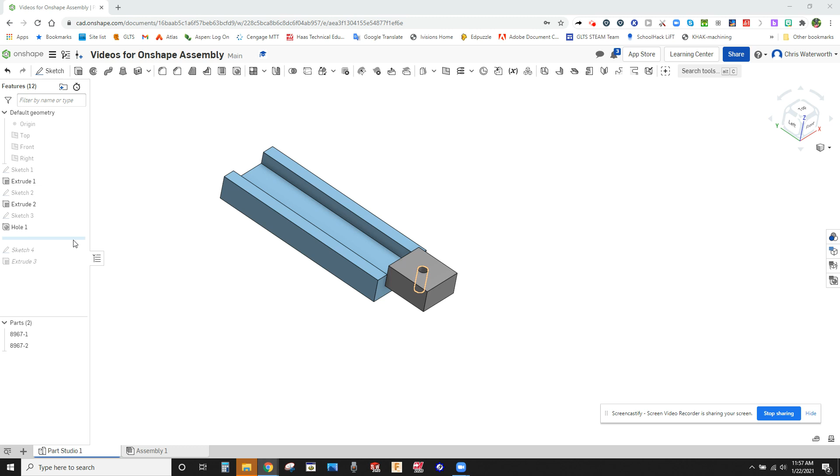What I did is I created a new sketch on this surface up here of the block, in this area right here. I made that sketch and then I extruded it, so it's kind of like a little handle looking thing or a cam, whatever it could be.

Again, because we're in the Part Studio, you can't move anything. Notice this is a different color now. We've got three different colors, so we've got three different parts. I'm going to rename this and just call it handle, to have a name for now.

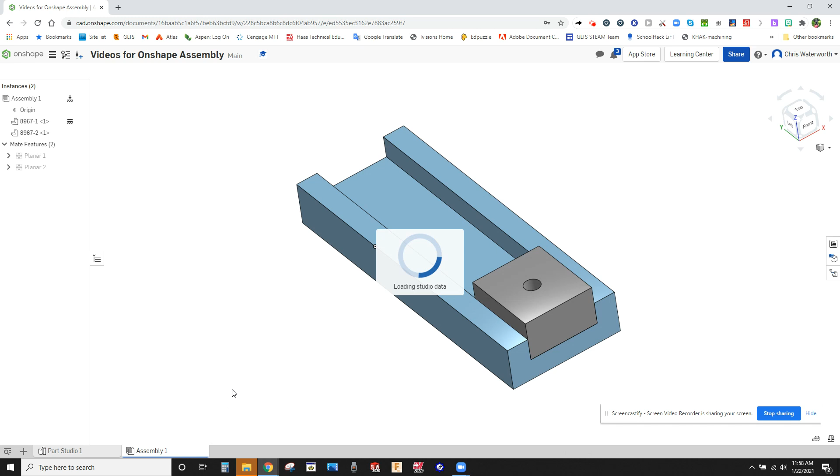So when we go over to our assembly, you're going to notice something's missing, right? It's that part, it's not in here. But what we can do is go to Insert, then just click on handle, and say okay. Now that handle's in there.

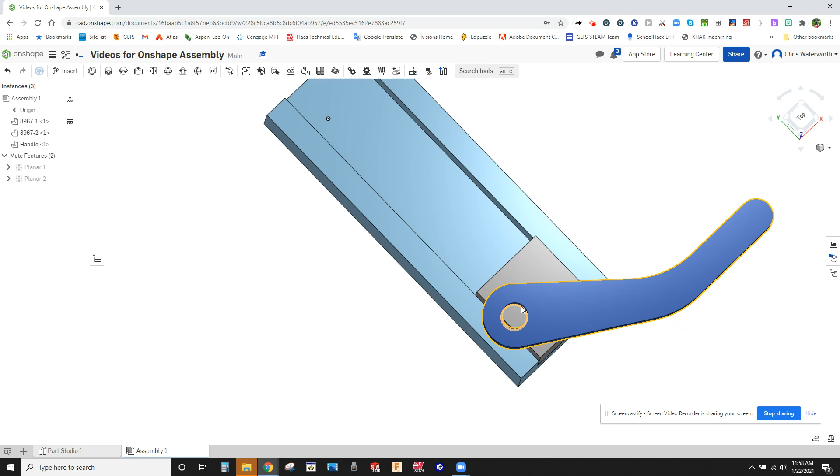But how do we get this thing to work properly? What I want is this hole and this hole to be concentric to one another. You want those lined up. I also want the bottom of this handle to be flat to the top of this block.

So there's a very easy way to do that, and it's called a revolute mate. That means you're allowing something to spin on an axis, but it's also tied to another surface. It does it all at once, which makes it very easy for you.

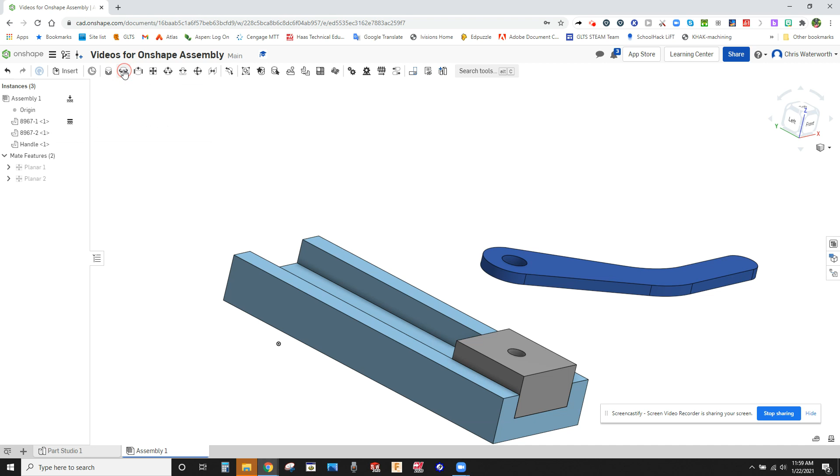So click on Revolute Mate, and I've got to put in my mate connectors. What am I connecting? Since it's hole to hole, I've got to go down here and see how this snaps right to the center of that hole. This is exactly where I want it, on this top surface, right in the center.

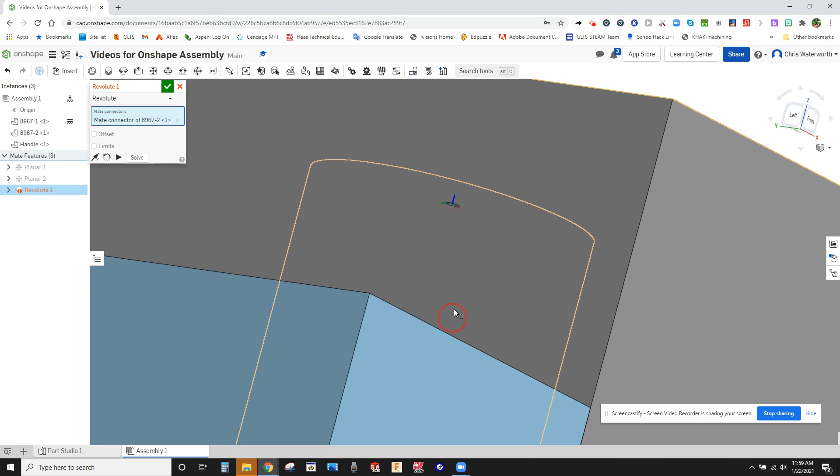From that point, I'm going to spin this so I can look from the bottom. I want to go to this surface, and I've got to move around until I get to the correct point. And that looks like the correct one right there. Okay, so what happens is...

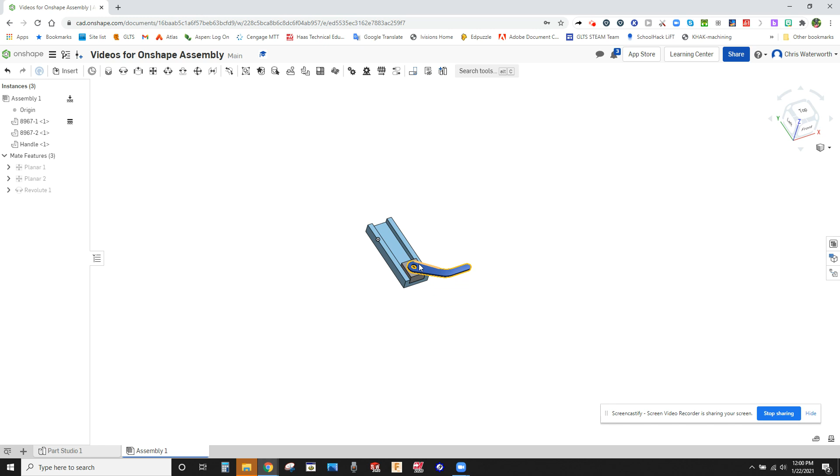These two parts are now concentric at the holes, and they're tied together on these two surfaces. But it still allows us, if this was a mechanism where we had to move something, to actually rotate this part.

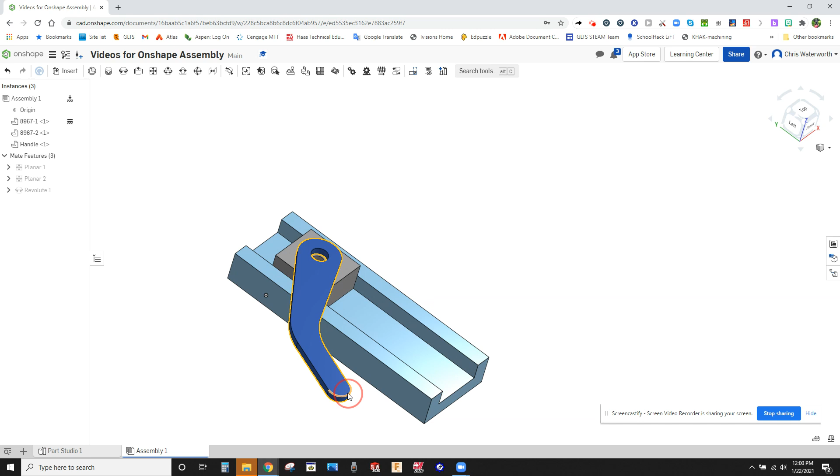So the way I have this set up, there's a couple of things going on. At the same time, we've got this slider block mated with limits inside the rail, and at the same time, we've got this handle that's spinning around, allowed to spin around it. You can see how quickly these tools make your assembly do what you want.

They're only going to be moving in a way that you're defining. So when you're building something and thinking of an assembly, you've got to think in your mind how this thing's supposed to work, how things need to be connected in reference to other pieces, and whether they are revolving, sliding, or limited in where they're going. As we go through, we're going to learn more and more methods for fastening things together.

There's a lot of different mates up here. There's a fasten mate, which just puts something in place and it doesn't move—something like a screw would be a fasten mate. We looked at the revolute mate already. We have a slider mate that we did—oh, we didn't do that.

No, we did planar mates. There's a special slider mate. We did planar, there's a cylindrical mate for two pieces that are circular, and we have pin slot, ball mate, and a parallel mate—so if something's parallel to something else. And if it's something rolling around the edge of a circular part, that's called a tangent mate. We'll get into these things step by step as we go through, but this is just one more basic thing.

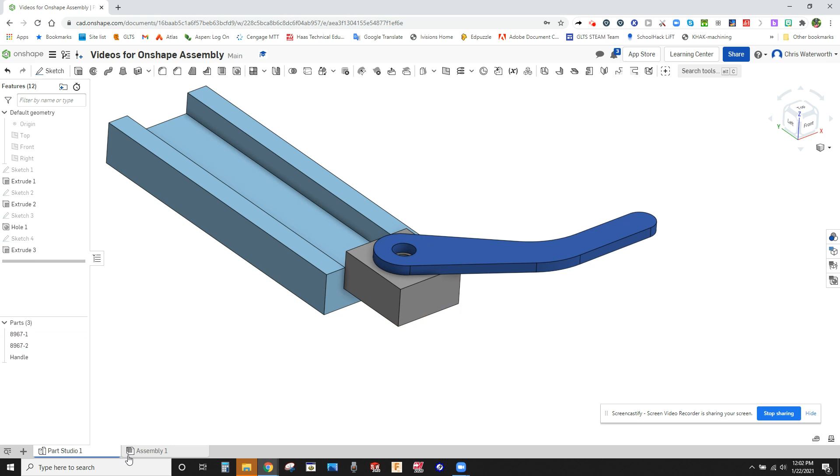So what you learned is in the Part Studio itself, you create that new product off of something that's existing. You've got existing geometry, but you can use that geometry to create a new part. We went to assembly and inserted that handle, then put on the revolute mate to attach the handle to the slider block and allow it to rotate freely.